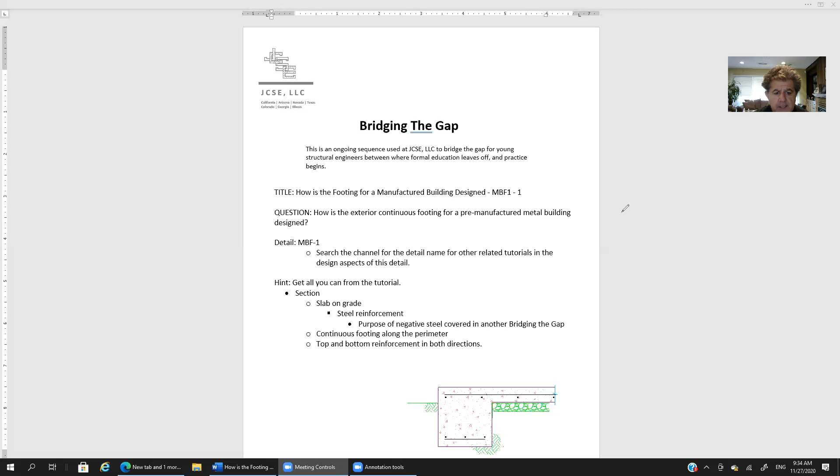If we scroll down here a little bit, you can see in the lower right-hand corner, that's the section that we're going to be dealing with. So that's a cross-section of the slab on grade and the perimeter footing. What you see there is steel reinforcement. This here is our negative reinforcement. We've got a bar going across here, and then you've got bars going into the page here, right? This is our negative reinforcement.

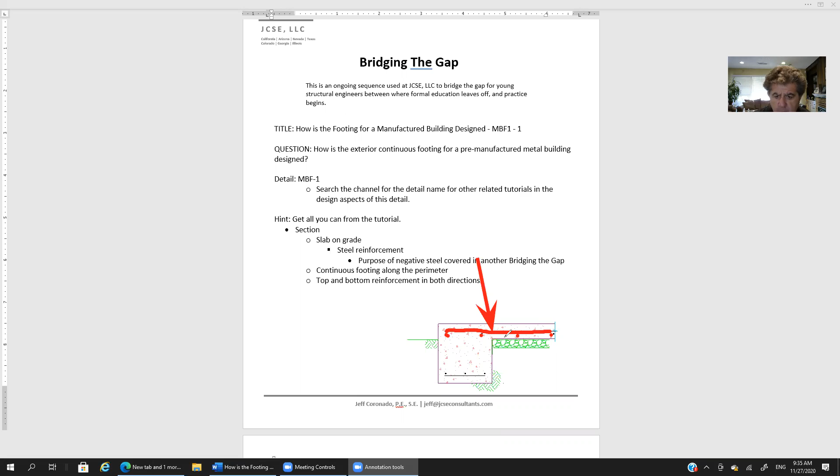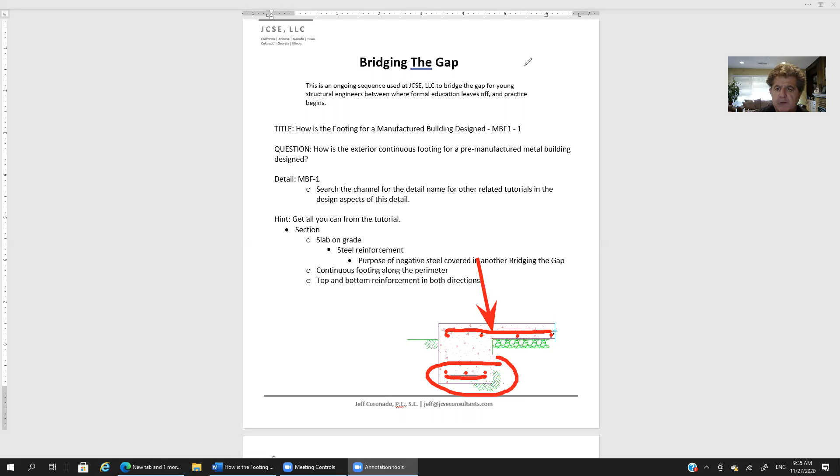The purpose of the negative reinforcement is covered in another tutorial in the Bridging the Gap series, so I'm not going to get into that here. Top and bottom reinforcement in both directions. Down here, you can see the bottom reinforcement, and then the bar going from left to right, which is right here. And then you see the bars going in and out of the page, which is what we would call the continuous reinforcement. You can see that above there. So let me clear that, and let me scroll down here.

Okay, so we have a continuous footing along the perimeter. Let me stop here and see if we can sketch this out a little bit. So getting back to a hypothetical structure, I've done a simple diagram here. Really, the complexity of the structure doesn't alter the lesson here. What we need to learn applies whether this is a simple rectangular footprint like we're showing here, or whether there's re-entrant corners or what have you.

So let's say the perimeter of the structure is in black, and the blue represents columns, okay? They can be wide flange columns, and in all likelihood, they will be wide flange columns. And let's say that hypothetically, these columns are spaced at 20 feet apart. Let me use another color. So this column and this column, that's 20 feet. This one's 20 feet. Let's just say the columns are at 20 feet apart.

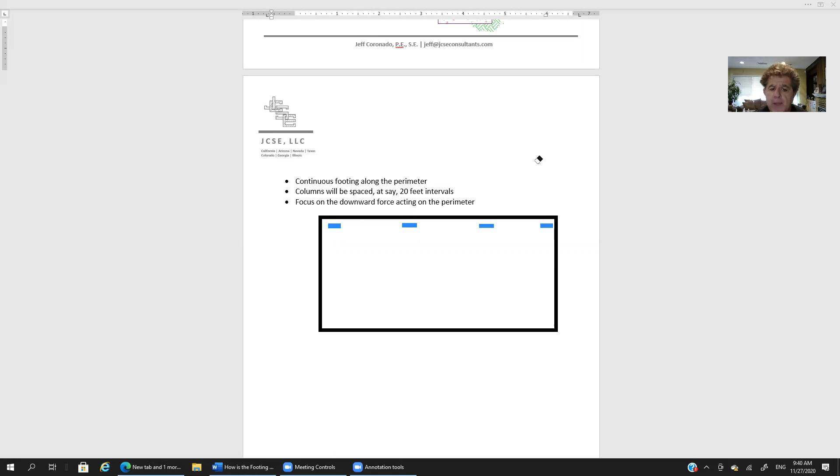So let's say that hypothetically we've got a downward acting force of 10 kips from one of these columns. Okay, so we're going to have, you know, undo that. Let me try that again. Okay. What is wrong with our arrow here, guys?

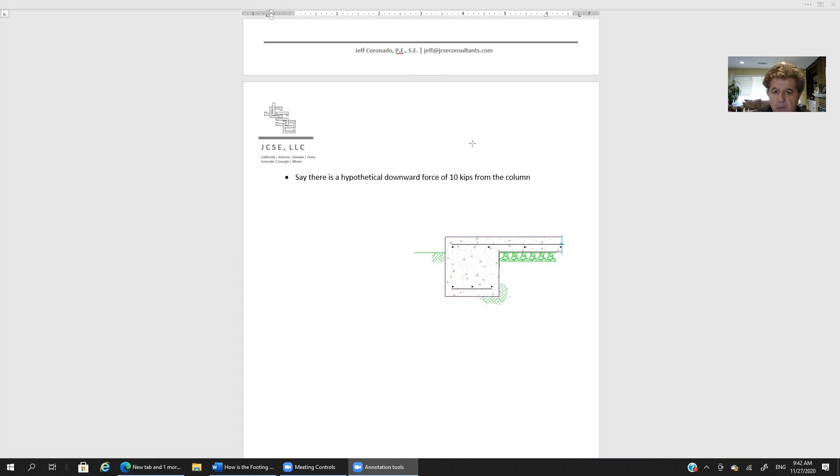One last turn. Yay. So there's our force acting downward on our footing, right? So let's just say hypothetically we've got a 10 kip load from each of the columns pushing downward on the perimeter footing. Typically, more often than not, when we have a column, we have what we call a pad footing. Designing a pad footing is not the purpose of this tutorial. That's covered in another tutorial.

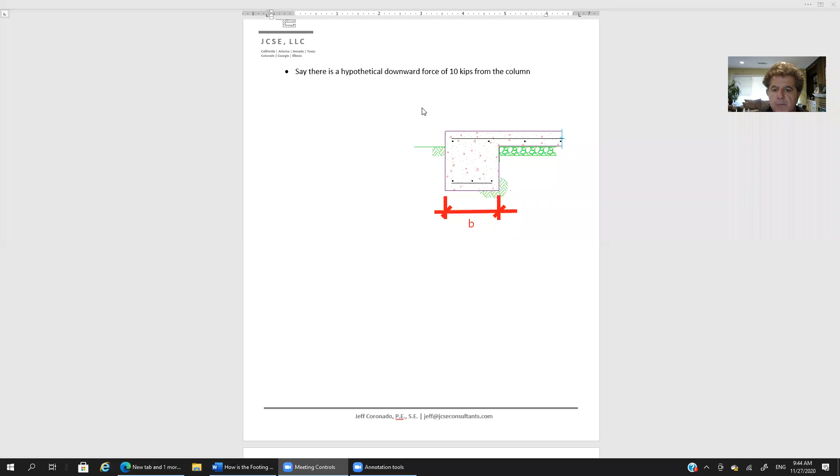Okay. So we've got this concentrated force acting downwards on a perimeter continuous footing. So one dimension for the footing is obvious, right? If we go back to this sketch, sure enough, one dimension is obvious. Let's see if I can label it. So the width of the footing that's going to support that column is obvious. Let's just call this dimension B.

Okay, so getting back to the other dimension, what dimension do we take in the other direction, right? The one dimension B, that's obvious. But how much of this continuous footing is it reasonable to take to resist the force that's imposed upon it by one of these columns? So just as a possibility, I'm throwing out an option. Change this to use another color. How about magenta? All right. So I think one possibility is this red dimension.

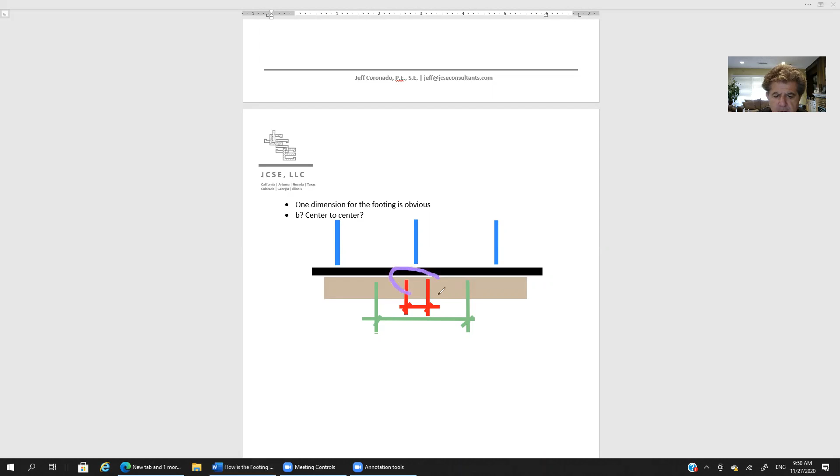Oh, by the way, have we talked about this yet? So in blue are the columns, right? We're looking at an overall elevation where we've got a column here, column here, column here. So the columns are in blue. Our continuous footing is shown here in black, and then here's the soil below the footing in brown.

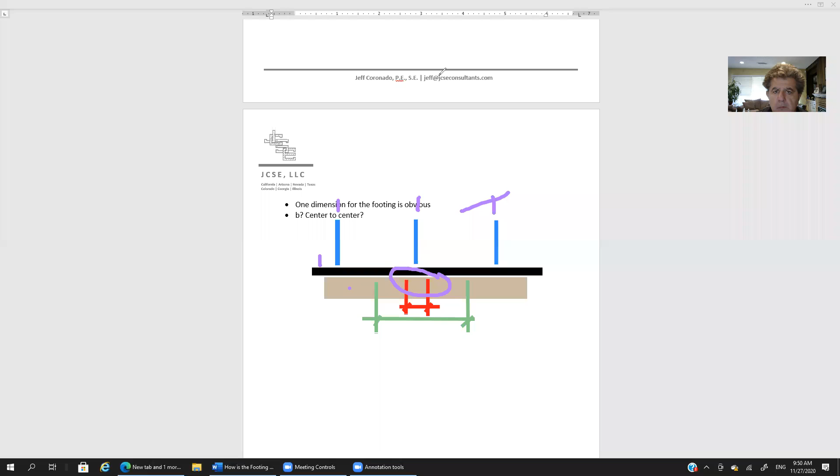Okay, so get rid of this. Am I able to get rid of this? Oh well, I guess I don't need my soil. I'm not going to battle that one for now. You get the point, right? So there was soil underneath the footing.

So the question is, what's the effective dimension that we can take in the other direction for this continuous footing? So yes, one possibility would be this dimension right here. Let's say this is B. Let's say we match the same dimension as we had in the other direction. Another possibility is this green dimension, literally a center to center distance. So let's say these are equal and equal here.

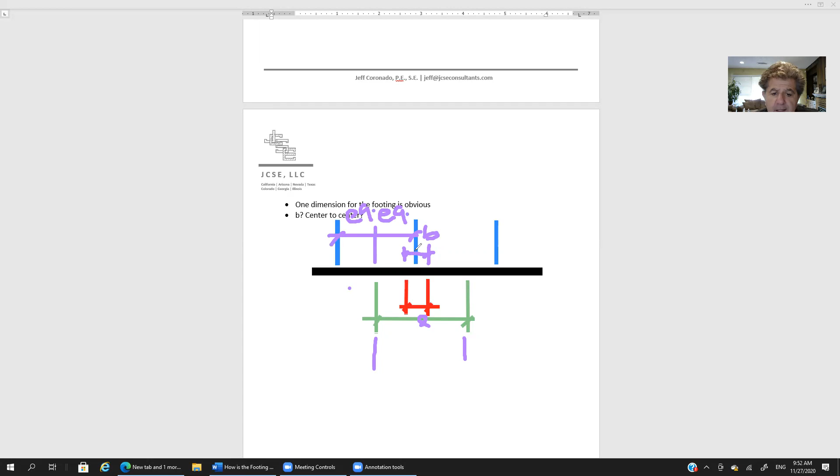All right. So in essence, we split the distance between the columns and we say that's the effective dimension of the footing that we can use. So think about it for a second. How much of this continuous footing can we use to resist the load? Can we use this amount of the footing? Can we use this amount of the footing? How much of the footing can we use to resist the load?

Well, here's how we would do it at JCSE. The magic number that we would look at is 4 times the thickness. And that's 4 times the thickness on each side of the column, okay? So 4 times the thickness, I'm sorry, 4 times the width, I should say.

Sorry, now I'm getting confused. 4 times the thickness, right? I said it correctly initially. Four times the thickness, so not the width that we've been looking at, but 4 times the thickness of the footing. 4 times the thickness of the footing on each side of the column is what would be a reasonable amount of footing to take. That's how we would do it at JCSE.

So we would take 4 times the thickness on both sides of the column and figure that's in essence your pad footing to resist the pressure from that column. Anything more than 4 times the thickness, if we start to venture out and say, well, what about using this amount of the footing to resist the pressure from the column? It's doable. It's not that it would be wrong. It's doable, but it would require more thought.

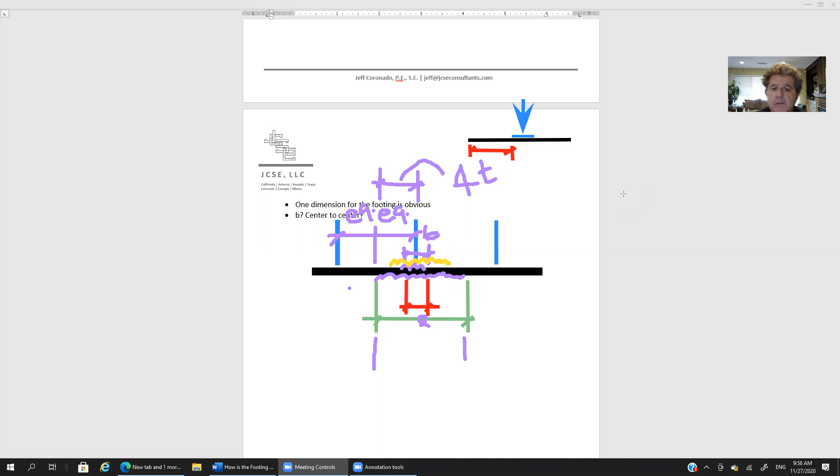If you really wanted to push it, you can also look at the width of the column. So you can take into account the width of the column. You can see this sketch up here, okay? So this little portion of the sketch. We've got a footing, which is in black, the column in blue, right? The column is going to have a base plate. That base plate has a finite dimension, whatever, 10, 12, 24 inches. So you can take the effective length of the footing to be 4 times the thickness projecting out from the edge of the base plate.

However, keep in mind that that is pushing it, right? Your best bet is to not take it from the edge of the base plate and just take 4 times the thickness from the center line of the column. So you go 4 times the thickness from the center line of the column in both directions, as long as the footing is there. Let's just say the footing only goes to 1 or 2 times the thickness of the footing on one side, then that's all you can take, right? But what you don't want to do is take more than 4 times the thickness of the footing going out in each direction.

So let's say for this situation where you have a column in the center of the footing, then you're able to take 8 times the thickness of the footing as the other dimension for the footing, and then assume it to be just a pad footing with those 2 dimensions, b in one direction, and 8 times t in the other direction. That's your pad footing. That's how you would design the steel reinforcement to resist that column.

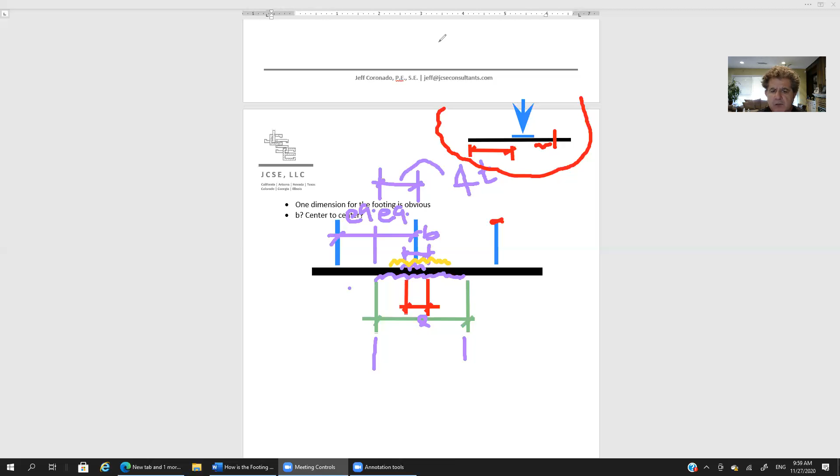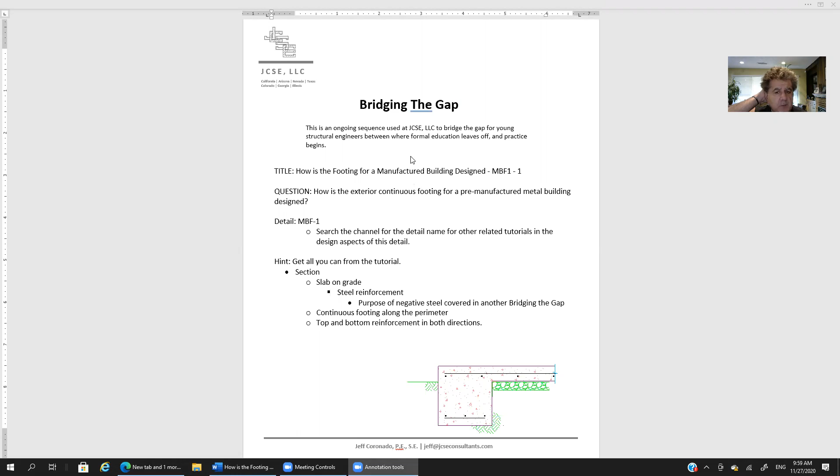Then what we do is just extend that reinforcement throughout the footing. So even when we're not underneath the column, we typically use the same reinforcement that we've designed for the area under the column throughout the perimeter footing. Okay, that's how we go about obtaining the positive steel for a continuous footing. Let me go back to the question here just to make sure we covered it. How's the exterior continuous footing? Yeah, we've covered the steel reinforcement for the continuous footing. Again, the negative reinforcement is part of another tutorial in bridging the gap. But we've covered the positive steel.